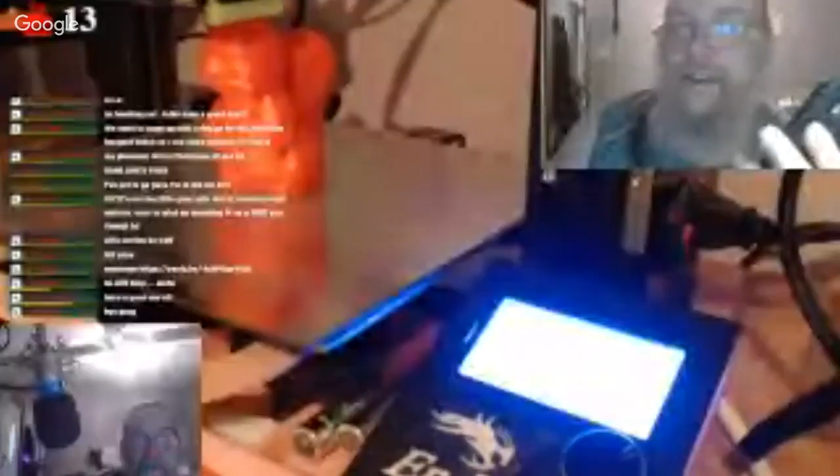Hey, we were trying to catch you guys before you left. We still had the hangout running. Oh did you? We weren't live, but no, it's fine. Get you some live time. But me and Dee were still sitting over there talking and watching his stream.

Alright, pop out the chat. Did he just jump in? Did I just see him jump in? Dee, he should be. Yeah, I should be in here. Yep, you're in here, pop out chat. Dee should be on his way.

So you guys never shut the stream down? No, we shut the stream down, just not the hangout. When I say goodbye to everybody, that's just saying goodbye to everybody online, on YouTube, on the video. Oh, everybody on YouTube. Yeah, because YouTube kicks you off. You can stay in the hangout, but YouTube kicks you off after 8 hours. Well if I'd have known that, I wouldn't have fired up a stream. Yeah, we just said right. No, that's fine, get some lunch done. You got all of us, so.

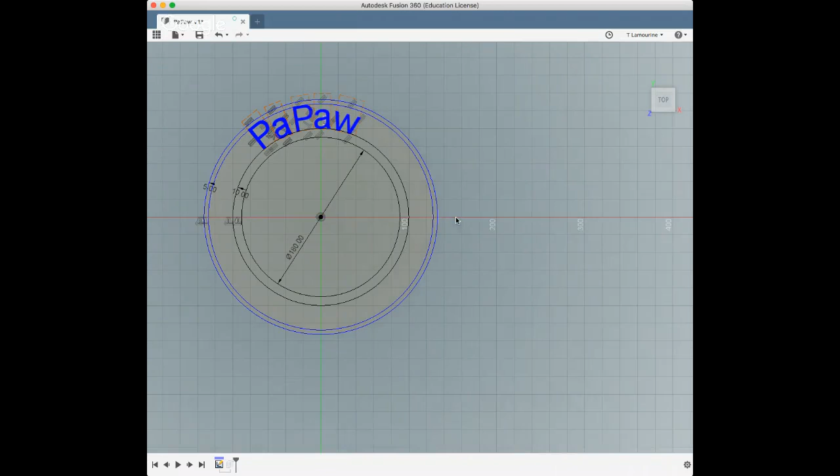There, I know he's got it now. Okay. So, my microphone is 180. So I've got this inner dimension correct. Well, the inner dimension that you've got is 180.

Yeah, it needs to be 178. Are you going to do a knockout? I don't know what you're calling it, in other words a knockout, want 180, but then there's going to be a shelf down to 176. Or is... yeah, there's going to be a 2-millimeter lip around both the front and the back edge. Okay, that's easy, but the 180 should be alright. No, that'll be too much. Wait a minute, right, so that needs to be 176. 176, 178, 178. Boom, done.

What else? And then there needs to be an 11-millimeter wide, 2-millimeter deep groove on that center ring. Yeah, I'm not worried about the groove, I had that at the end. Oh okay, is this wide enough? 10 millimeters. Yes.

And is it 5 on the wide outer ring? That's good, is this wide enough at 5? So you just want a line right from here to here? Yeah, but closer to the lettering. Hang on just a second.

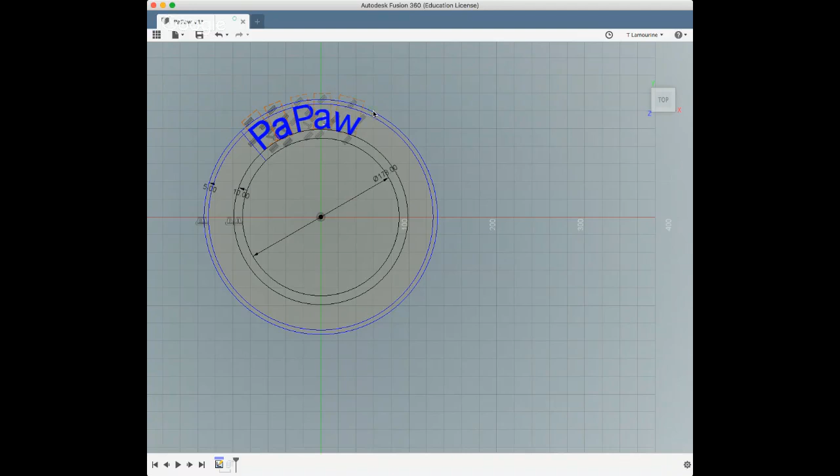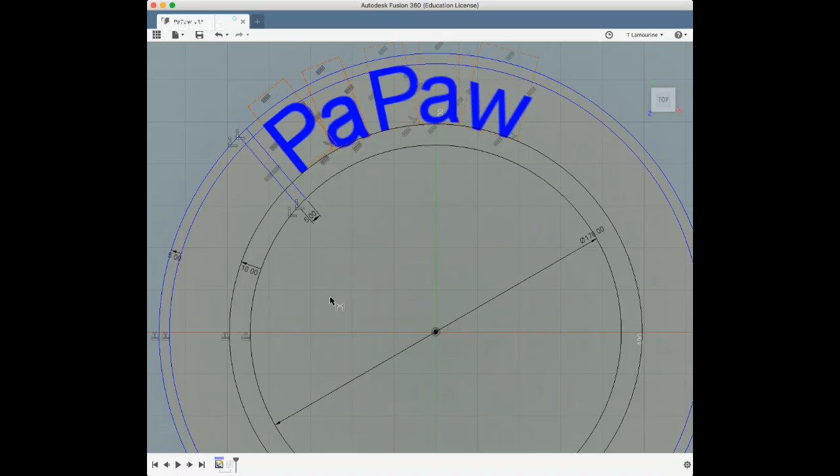All right, these two parallels. Parallel, boom, done. Oh, they already are. How far apart you want them? Hang on just a second. Everything else is 5, so I'm just going to do an easy 5. Yeah, I want the sides to be the same as the top. Okay, 5 it is.

Same thing over here, draw a line, and then get the spacing away from the letters symmetric or the same, whatever. I just placed the letters. If you look, I think one's bold and some aren't. The text is the hardest thing for Fusion to deal with, it has a hard time with text.

Okay, so if I extrude that now, it should be all right.

This is the other thing I don't like about it, because the move tool kind of gets in the way of the actual moving. That second A has to be touching the bottom ring. It actually is, okay, so it's not free floating. See, but now it's got a freaking lock on it somewhere.

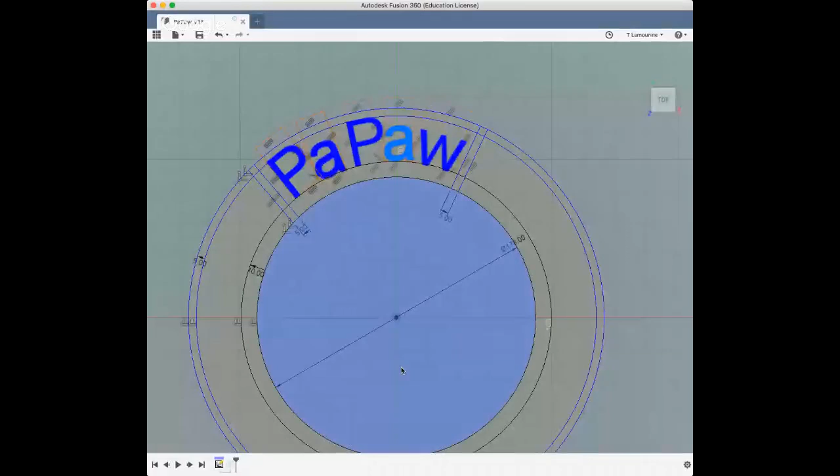Whoops, what'd I do, hit the wrong thing. Is it still showing you guys my window, or is it black? Where'd my window go, it's black. Where'd the window go? What the hell happened? There it is, back again. I'm trying to do too many different things at once.

Yeah, it's in contact, just barely, but it's in contact. I wonder if I can rotate it a little to get that. God damn it, I keep doing the wrong freaking key combinations because I hate it when everything does different key combinations.

Move is a simple M. I don't want to move that one, I want to move this one. Cancel, too many windows open. That one, M. Rotate a little bit. I don't even think it'll let me because it's already locked down. See, they're all locked together. Yeah, which I can break. See these little things right here? These little icons, those are the locking combination thingies. I don't know what they call them, constraints, I guess. Now I should be able to move that.

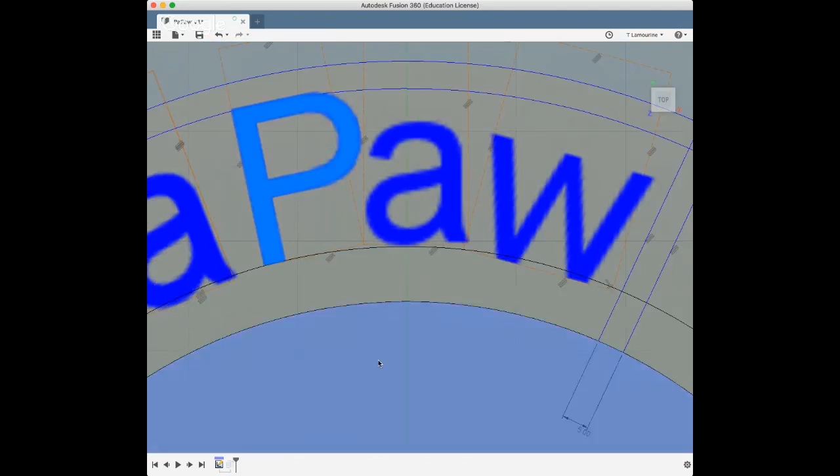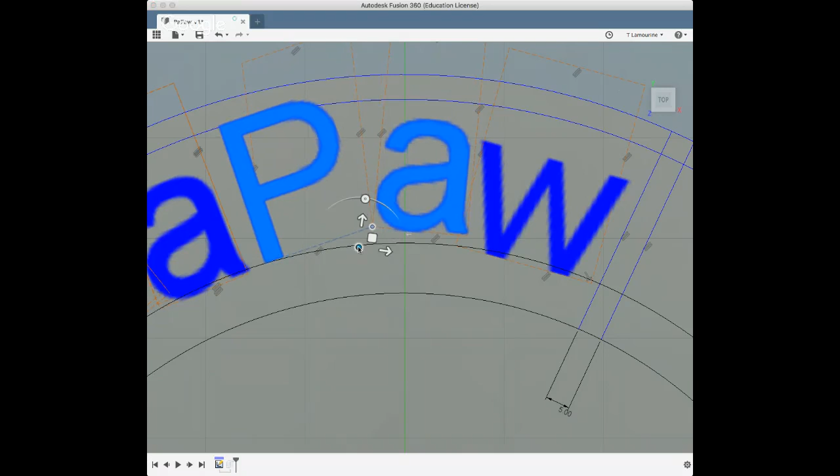So it keeps selecting the P for some reason, I want to select the A. Move. Now I should be able to rotate this, and it doesn't want to rotate. Why does it not want to rotate? Why are those still too locked? Those should not be locked anymore. I unlocked them. Command Z. Oh, easier way, cancel, delete.

Put a new one in. Yeah, text is the weak spot that I found with Fusion, and I think there's a way to do it, I just don't know how. Yeah, I'm going to lock it to the circle. Hey, yeah, I made it 40.

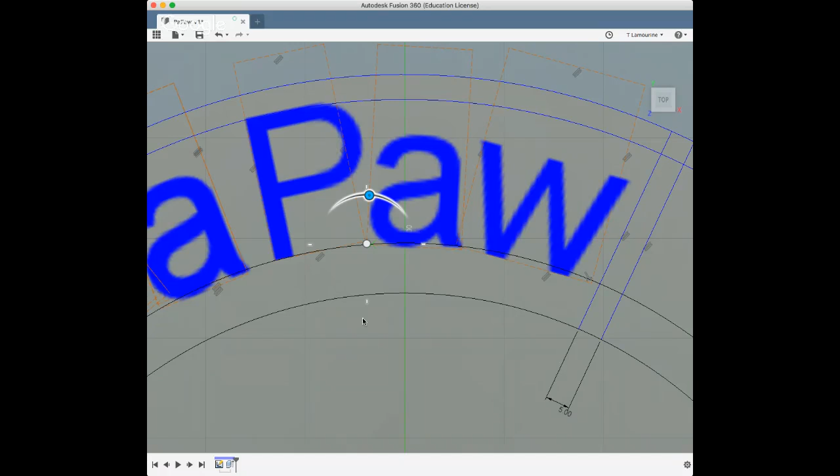That's not attached, is it? Edit sketch, it should be attached. Oh, I know why, I have to edit this because it's still remembering the other one. Now it's attached.

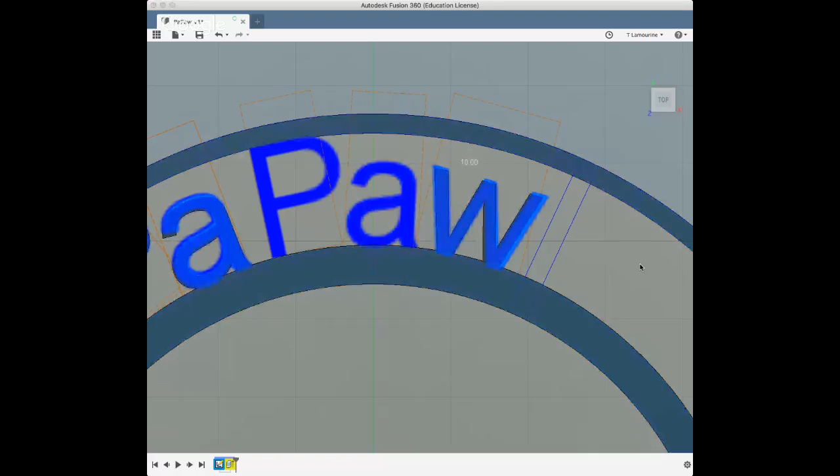Okay, then I want to extrude it. My poor little computer is dogging trying to do all this stuff at once.

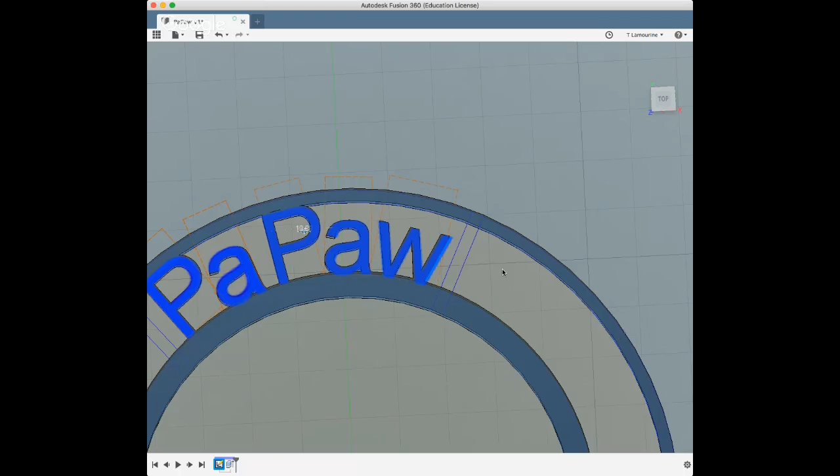Whole thing, all right, I gotta edit that out. Remembering the old stuff, I can almost do this faster from scratch.

I gotta bring my mic over here so you can actually hear me, huh? Yeah.

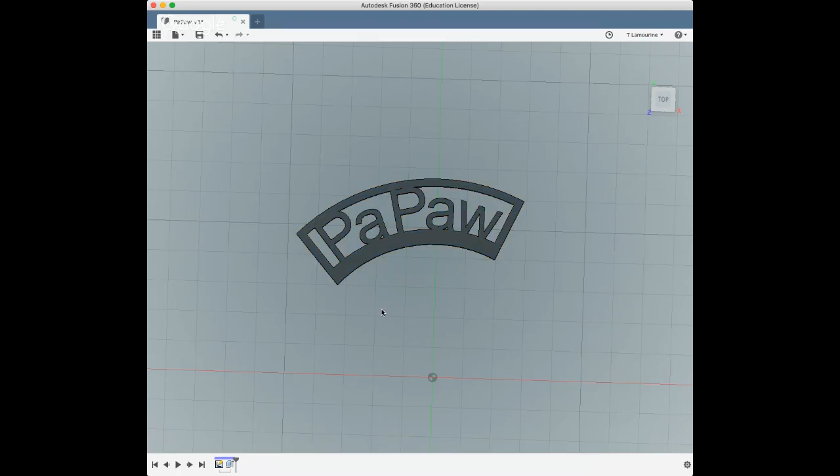Okay, that's basically what you're looking for, right? Can you see me? That what you're looking for? Yes. That's it, right? Now you want right here, you want a lip, correct? Yes, all right, let me see if I can get this right.

How much of an extrusion, how thick do you need this thing height-wise? I need it to be a groove through the center of it. Oh, hang on, before I get into that, how much of an extrusion here? How deep does this need to be? 15 millimeters. 15, yeah, because I had it at 10. 15.

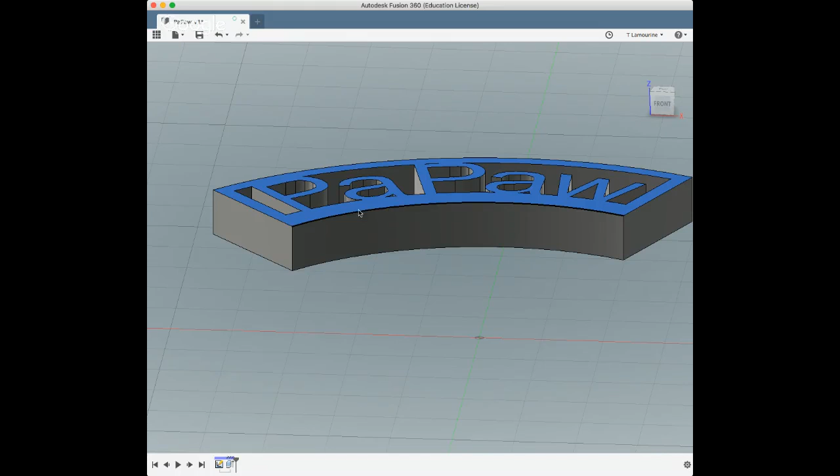Turn, okay. And it's going to take my little computer a while because I'm hosting this and doing that. Okay, now, you want a lip where? Right here? Down on the bottom, you want it on the bottom or the top or in the middle? Hang on a second, let me...

Okay, let me close. Nope, let me shrink. All right, can you see me? Sort of, but not enough.

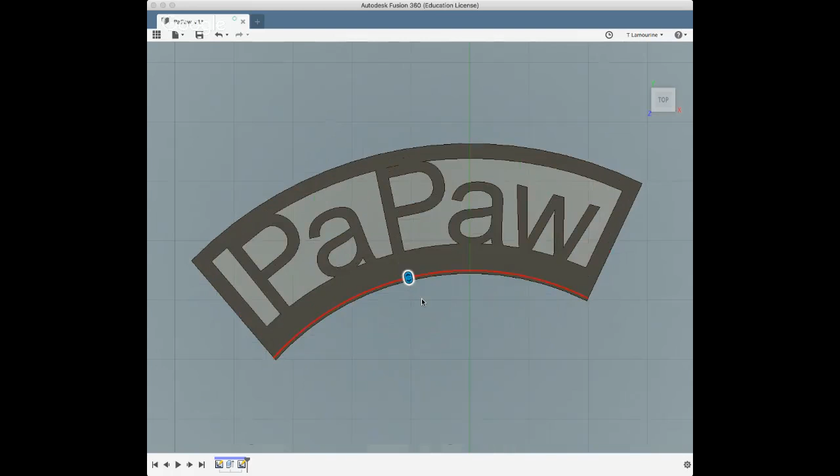Okay, how deep does this groove need to be? 2 millimeters. That's the depth into the cut. Correct. And it needs to be in the center, 11 millimeters wide. That's only going to give you 11 millimeters out of 15, leaves you 2 on either side, correct? Correct. Offset, negative 2, negative 2 with a negative 11. Boom, done.

That's what you're looking for. That's what I'm looking for. There it is, all done. Son of a bitch, and that took me longer just because, if I knew the dimensions beforehand, I could have done it even faster. Yeah.

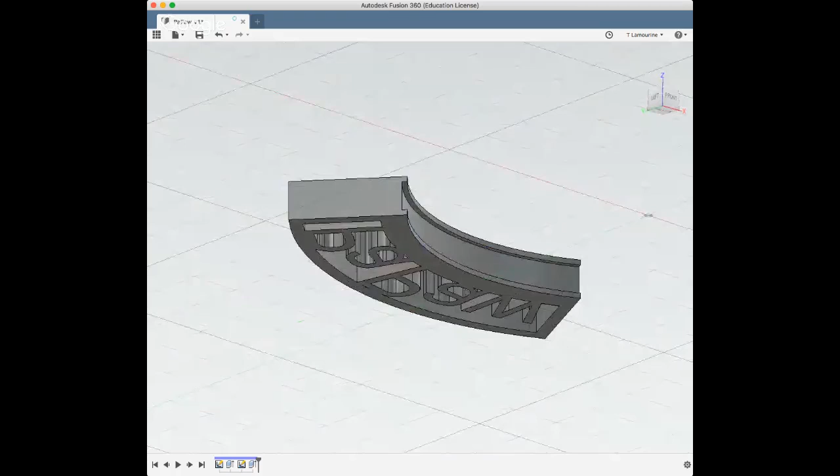I still think you need little kitty cat paws right here. No, come on, no, you need this. PaPaw is not about animal paws, it's about grandkids. Yeah, but it's still a pappy paw. Yeah, paw, pappy paw.

You want anything rounded off, squared off? No, just like it is, looks good. It looks kind of boring with no chamfers or anything on it, man. Different font. That's just the first font that came up.

You can't change the font now, can you? I can do anything I want. My standard font is stencil. I don't think I have that in this. It's pretty common. Arial. Stencil. Sticks. ST song, no stencil. Okay, then just leave it like it is.

Stencil's the one with the little knockouts, like a regular old-fashioned paper stencil like we used to use in high school, right? Yes, I think there is one of those. They just don't call it stencil, they call it something else. Now I got to remember what the hell it is. I think it's actually in here too, and actually it might be stencil, it's just something stencil, you know what I mean? So it's not the word. Right.

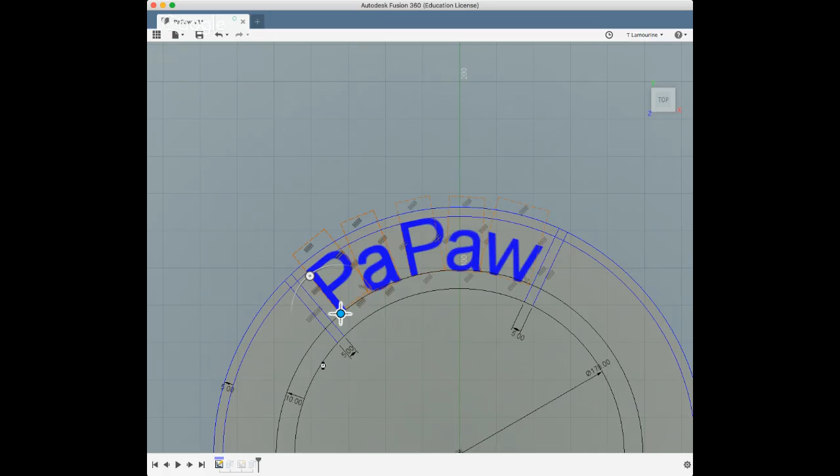Well, for now, we'll just leave it at this, he can always print another one. Yeah. But I've got, what version is this, CS3. Wow, that's old. Yeah, I had CS4, it was the last one I had, not as old as mine.

Mine is just Photoshop 6. Oh, God, that is old. Yeah.

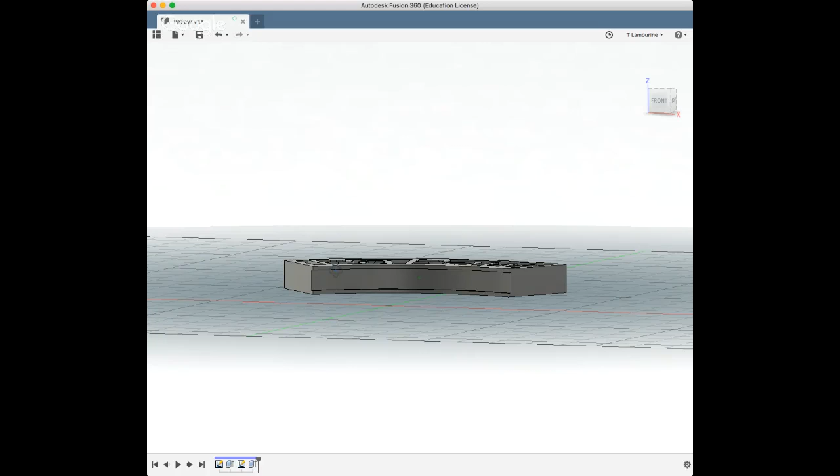If you guys are on Macs, see this right here? I know you probably can't see it because I'm just sharing, but there's a program called Affinity Designer and Affinity Photo. They used to be Mac only, but they're actually doing the PC side now, and they're very comparable to Photoshop, and they're like $29.95 each. They're freaking awesome.

GIMP and Inkscape, oh, I can't stand them. Both of them, the way they run off the Unix system, just bogs my computer down to no end.

Anyways, I am saving this. Save. Next, save STL. It's going to overwrite it. Yep, replace. So for this kind of thing, it's mostly squared off stuff, it works good.

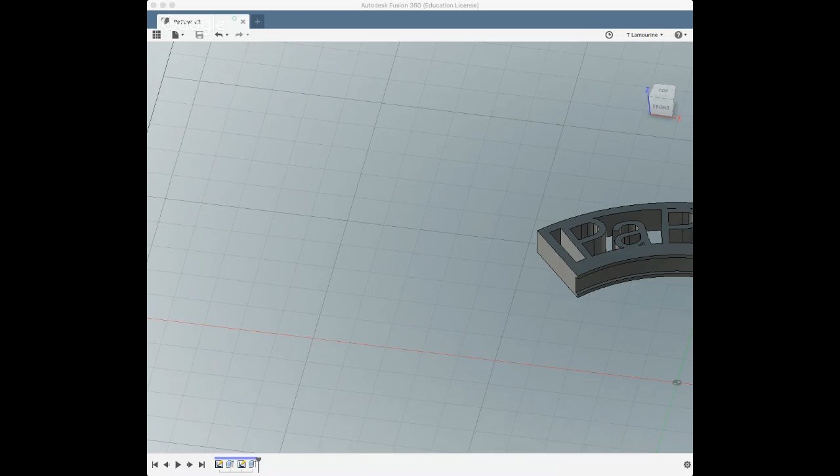Does it work just as good on artistic stuff like Ricky's Jeeps and stuff? Yeah. The Jeep I wouldn't call artistic. But your basic mechanicals, it's way better than just about anything, without getting into more complex stuff.

Honestly, it's kind of funny because my brother runs a big company. He's basically the vice president, or he's not actually vice president, but he basically runs the place now. They build the circuit boards and stuff for coin op machines. Like if you see a Coca-Cola machine, Coca-Cola owns the machine, but they do not own the little coin op block in that machine. It's usually contracted through a coin op company.

He's got 3 engineers there, and they all wanted SolidWorks, so they went out and paid for the licenses for SolidWorks. Well, they hired 2 new younger engineers who said, yeah, we want SolidWorks, but we want Fusion 360 also. Actually, they use Inventor. They're like, we want Inventor also. It's cheaper, it's faster, it'll do a lot of the stuff SolidWorks won't.

SolidWorks has its advantages, Inventor has its advantages, depending on what you want to do with it. They almost all, the 3 original engineers, are all using either Fusion 360 or Inventor now. They don't do anything else, they barely open up SolidWorks at all. They're like, SolidWorks has its advantages, don't get them wrong, but any shortcomings in Inventor or Fusion 360 they've come across, they can fix way easier and in no time compared to the few issues SolidWorks has.

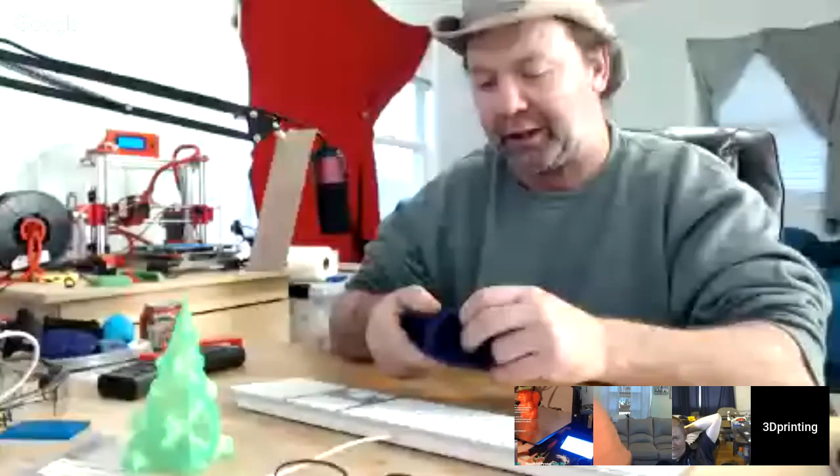They got those high UV output cure boxes now that'll cure them in about 10 minutes. Yeah, you can do it with a black light. Or put it outside in the sun, the sun's better, one of the best cures. Takes like 10 minutes in the sun to cure it, depending on the color. If you've got a solid color, it takes longer to go through it.

Get that all fixed up? Looks that way. It's on the printer.

When you go to Open Fusion and you're looking for tutorials to play with, don't even bother going to YouTube. Open up Fusion, go to the Help menu, and there's a whole bunch of tutorials right there inside the app that are absolutely perfect for Fusion. They're all like 3 to 5 minutes, very specific to a tool. They show you 2 or 3 different ways you could use that tool, then move on to the next one. Is that what you're doing, Mike?

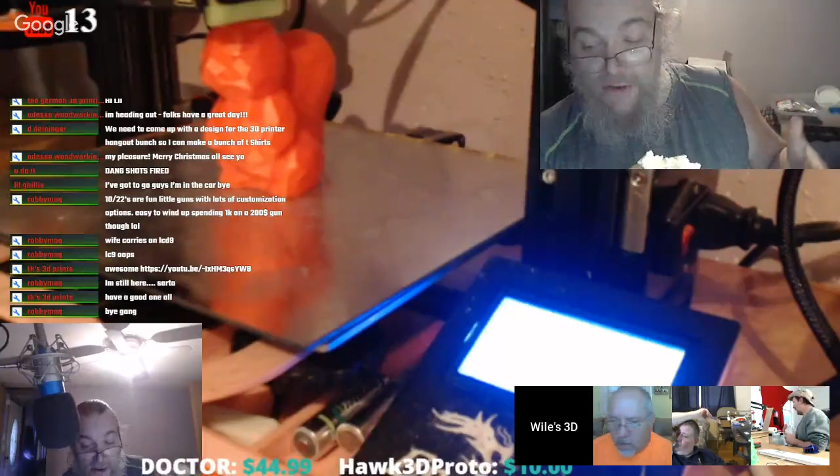I started Learn Fusion 360 in 30 Days. It's a course on YouTube, and you can do as many as you want a day. But yeah, I've looked at them videos too that he's talking about.

Yeah, I've done both ways. The ones I kind of like because they repeat the steps. The Learn Fusion 360 in 30 Days one, they go through one command, and the command goes by, and that's it. Well, no, they've been hitting them back up, because you use the same commands for different things in every design.

The ones in Fusion are just very specific to a tool, and they only do the tools most used - your extrudes, your circles, your sketching. It's very basic, just enough to get you started, but that's all I think he's going to need, because he's got it. I could tell the way he was working just in Blender - he understands the whole concept of the 3D relationship and how to do it. So the rest of it in Fusion - and Fusion's kind of self-explanatory. You start doing something and you screw up, it lets you know. It's got an error code that tells you right away this will not work.

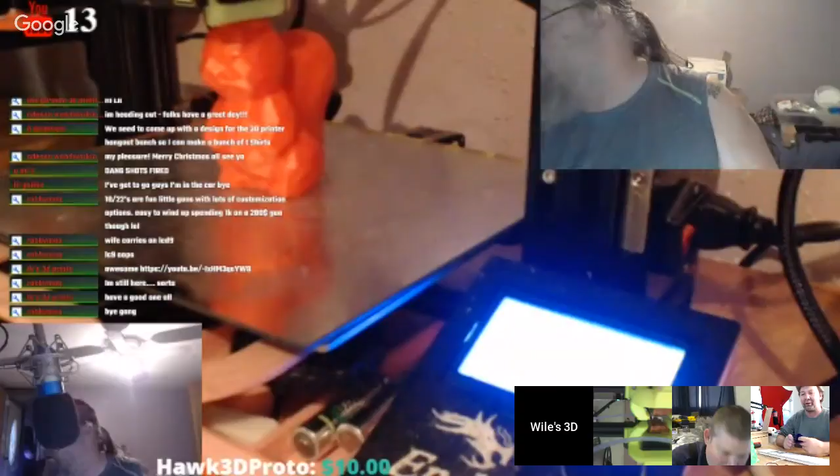You don't need it, the other ones do work, they work just fine. There's really nothing wrong with them, it's just that the Wacom is the creme de la creme. There's a noticeable difference when you start using a Wacom after using a cheapo. It's much more refined. I don't even want to say more precise, it's more natural, if that makes sense. You don't have to think about it, it's just like drawing with paper and pencil.

Like I said, this one has the right and left click on it also. Yeah, mine's got that too, that's the actual Wacom one. And mine's got a mouse too. With this one, with the press, it's not a mouse, it's just a pen. Oh no, mine's got an actual mouse.

Well, the new Wacoms are actually touchpads too. There's no more mouse, you can just hit it with your fingers and hold your finger there for a second, and it asks if you want to use it as a touchpad, and you say yep, and you can use it as a touchpad.

But I hate touchpads, they drive me nuts. The whole put three fingers down, twist your hand around, use both hands, do this, swipe here, do that. It's like no, I'll use my regular mouse, thank you very much.

Lift your leg up behind your head and stick your toe up your nose. Yeah, the whole touchpad thing, the Apple touchpad, now they got that touch bar. It's just stupid, I don't need that stuff. It does not make my life easier, it makes my life more complicated.

That's because you're old, Tom. I am, for the future, you know. You realize I've been working on computers since like they existed. Kind of funny, I got them shortly after they existed because once my uncle got a new computer, I always got his old ones, you know.

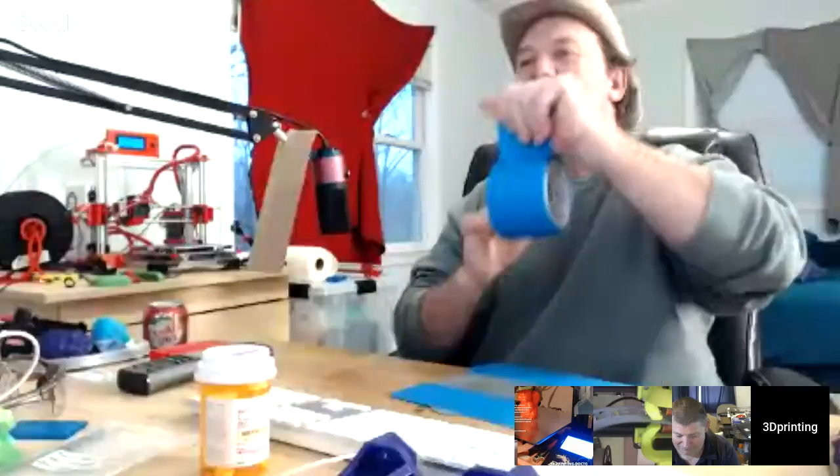Well, it's getting low - I've had this about a year, and it's time for a new roll. That's some nice big thick stuff. This isn't even my thickest, I got 4-inch instead of 3-inch. But the 4-inch is really cheap stuff - this 4-inch roll is $5 cheaper than this 3-inch roll, because it's some no-name. This is actual 3M, really nice stuff. Yeah, some cheap no-name brand.

There's one thing I like about this - nothing ever lifts off of this, because this stuff is true painter's tape, and it's got like a soap on the top face. So when you hit it with rubbing alcohol, it gets gooey and the print sticks to it. The problem is the print sticks to it - if you hit this with rubbing alcohol and then print on it, the print is not coming off this paper without soaking it in rubbing alcohol or rubbing it later. It's sticking to this - even ABS will stick to this. I've had this tear the tape off the bed before it'll separate from the print. Every time.

Okay, there's like right on the edge. You know what, I'm going to replace that piece too. I just don't care.

I took that ultra base off my printer. I couldn't get anything to stick to it, so I just put the PEI sheet down and it's been working fantastic. Yeah, even PEI, I actually like blue tape better if I'm concerned it's going to not stick. I still get PEI to let go on occasion in the middle of a print.

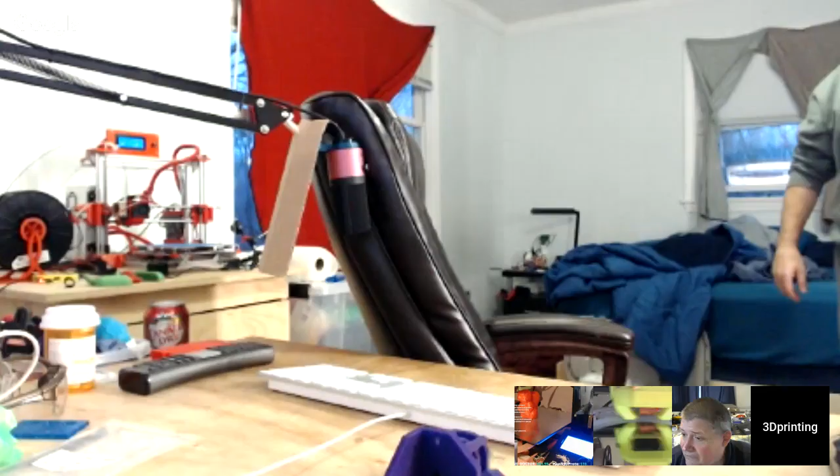Can you hear that? Yeah, turn it down. Fartin'? Oh, Martin, Martin, I thought you said farting. Martin, it's farting.

I need a drink. You hang out. Yeah, I'm just popping around different channels. Uh-oh, is Tom starting, or Tommy almost starting, a cocktail hour? Let the fun begin.

I still gotta dig through boxes and find my Roku, whatever the hell it's called. I'm gonna go watch my YouTube videos and everything, you know. I hooked up one of the Amazon Fire Stick TVs, just like the Roku, but it also has all the content from Amazon Prime. Yeah, we were debating what to go with.

Oh, I got such a good deal on them I couldn't pass it up. I got one of the 4K versions when they first came out, and it was like $30.

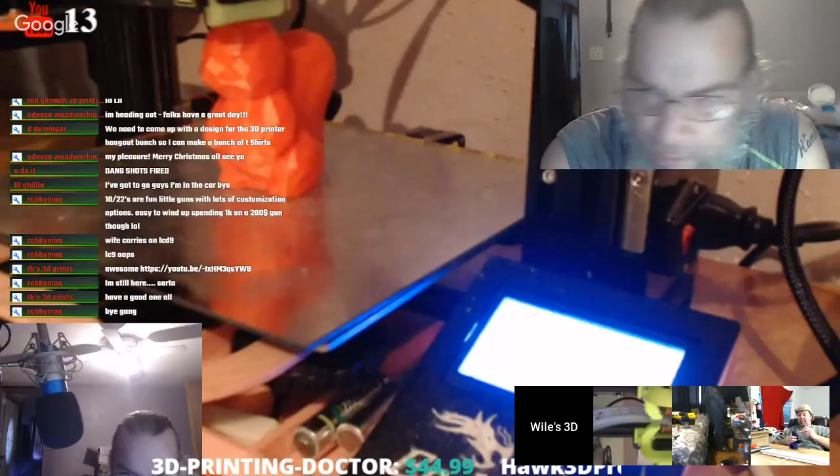Beer never thrilled me. I drink beer because my friends drink beer, and I like a good beer, just not the funky ones like Mickey's. Otherwise give me a Busch Light or Bud Light. I can drink those, and I actually like them in the middle of summer after a hot day of work. I can come home and chug a cold Busch or Bud. But if I'm going out to a bar, I'd rather have a Sam Adams. I do like Bass, though Bass is actually my favorite.

Have you ever tried the Sam Adams Utopias? It's a super high alcohol content beer. I used to get the triple bock. Yeah, that's like drinking brandy for crying out loud. One sip of it is like chewing a whole loaf of bread, it's thick too. I think it's the same thing as their triple bock. It's chewy, not even drinkable, kind of nasty. If I gotta chew my beer, I don't want it. It's actually a good drink, but it's so thick and heavy, like finishing off a whole loaf of bread. Yeah, the triple bock was the same way.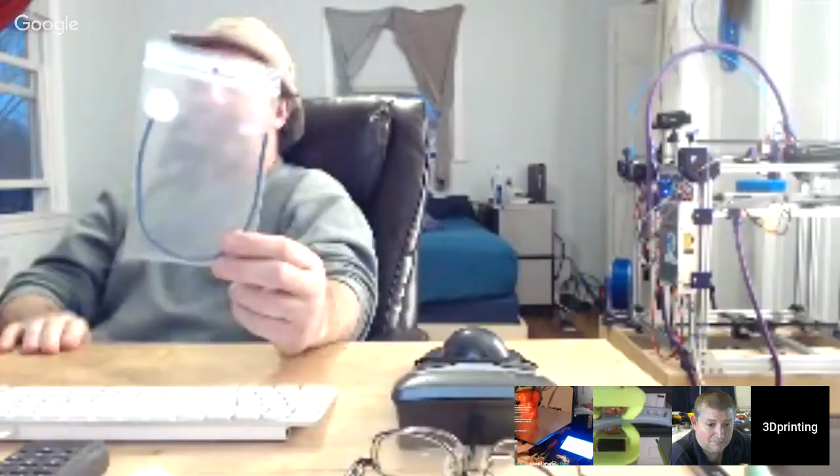I've done mine, I've done both of these. Still got what I got left, and it used to just arc over and meet the other end. That's how much I got, $7. So this will last me years, so it's worth it in that sense.

But yeah, I had this, this is the dark stuff. I had this on that originally and it would just jam constantly. And it wouldn't even jam at the extruder, it would jam in here, inside the tube. It would just jam in there. Like when I'd go to load it, it wouldn't load it, it would just sit there and skip.

Now I've been thinking about putting it back on there. And I got the Bondtech extruder, because I don't care what you say, that thing will, I'm scared that thing's gonna blow my freaking nozzle right off the edge of the extruder. That thing starts pushing and I hit it.

That's 1100 millimeters, that Bowden tube, extruder to the hot end. So when I load it with that control panel, I loaded it like 3,700 millimeters a second or something. So it loads it like that, pushes that full length in no time. You hear that thing whine.

Well, when I first started doing it, I had it like 1,200 millimeters, figuring I'd hit it and extrude an extra 50 or 100 millimeters. And it just started, the whole freaking printer started shaking. I was like, whoops, don't do that no more. I literally was concerned it was going to blow apart the heat break or something, just tear it apart.

I gotta go guys, I got 3 dogs that are... That are what? I don't know, he clicked himself out before he finished the sentence.

You know what's coming up here now? I'm still looking for my damn Roku, whatever the hell it's called.

Grinder. Not getting this one too well. Mom's crap, she'll want that. Some sticky stuff in. Alrighty then.

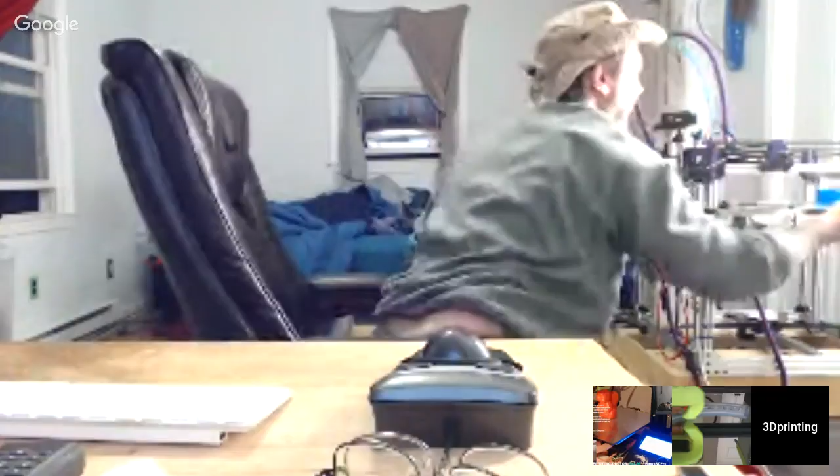That's done. What's that? A lot darker and thicker than I thought it was going to be. I'm gonna have to cut some holes in it, that way the light can shine up through here.

No idea what these are. Some sort of applicator for a woman, I think.

I just noticed this tree is 5-sided, not 6. This tree is 5-sided, not 6 - most things, hexagon. Christmas tree, it's 5-sided, well 10-sided, you get right down to it, but it's not a hexagon. It's a five-agon or whatever you want to call it, there's a name for it. What the hell's the name I'm looking for?

Let's see, what can I draw him here with? God damn it.

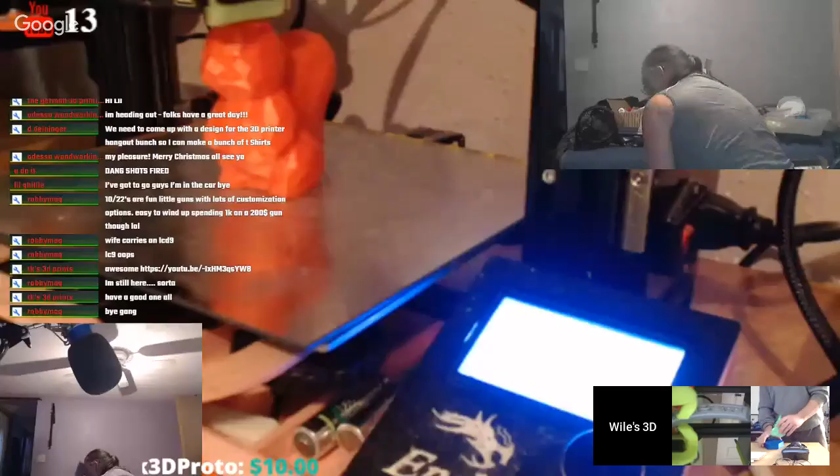What the hell's in here? It's just so heavy, same thing.

I know I've seen a shirt around here somewhere, I just don't know where. Just turn it here too.

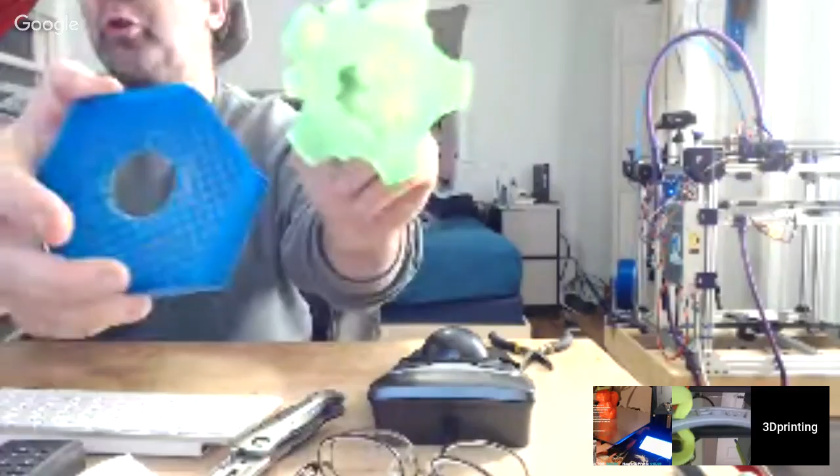After all that, now there's holes in it so the light can get up into the Christmas chimney. Look, holes - they're very rough cut holes, but they'll let the light up there, and the tree will glow. I'm going to glue that puppy down now.

There you go. God dang it, it's right underneath my desk. Right in front of your feet? Right underneath my desk the whole freaking time. In other words, if it was any closer, it would have bit you. I'm surprised it didn't bite me.

No, it can just bite me. I'm mad. All right, that don't look so bad, does it?

Glue that puppy. Where's my glue? What do I do with my glue? On the bucket, dear Liza. A glop. Oh God. Glop. Oh crap, I'm getting glue everywhere.

So you've been tinkering with this Fusion 360. Have you designed anything yet? Just whenever they told me to. I did do one thing, I forgot what it was, but I did do one thing. I couldn't get it out of there. I designed it and everything, but I can't get it out. It is what it is. It's still in there. I think it's gonna stay there for a little while. I can't get it out. Sounds like a personal problem.

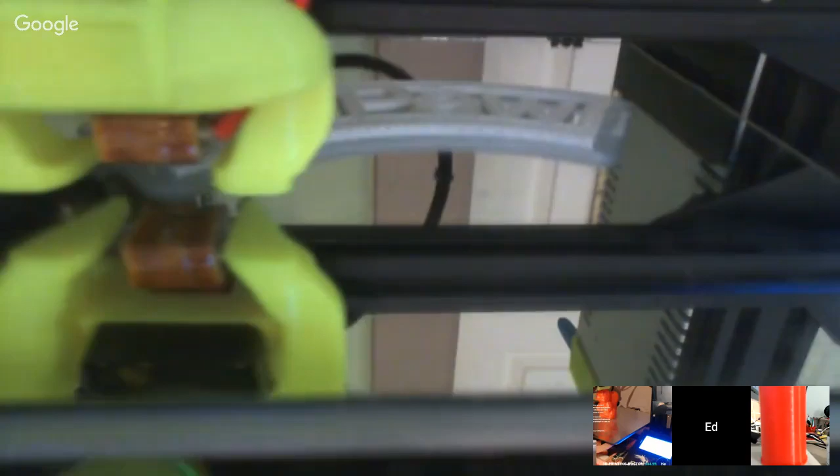I'm gonna have to cut out of here and go make dinner. Dinner? Well, you can leave, me and Ed are staying. You can shut it down, but me and Ed are staying, right Ed? That's right, now that he knows we can stay. No, if I boot you, you're not. I guess not, yeah.

You do the big old ban hammer. You are correct.

Did you get that thing done yet? No, it said it was going to take like 4.5 hours to print. Really, it looks like it's half done. Well that was at what, 3 o'clock? And it's 5 now, it looks all right. Yeah, it's looking good.

I sure appreciate that. No problem, it's not like it saved me a lot of work. Yeah, you can still be in Blender trying to design it, right Ed?

Said you can still be in Blender trying to design it. Well, to be honest, this is my second attempt at it. I spent a few hours, 10 minutes. I was laughing when I said I could do that in 5 minutes in Fusion. He goes, yeah right, let's race. It was like 5 minutes later, I was like done. He's like, no you're not, you're kidding. It's like, no, I'm done, it's done. I would have told you that one. Don't bet on that one. He's done, I guarantee.

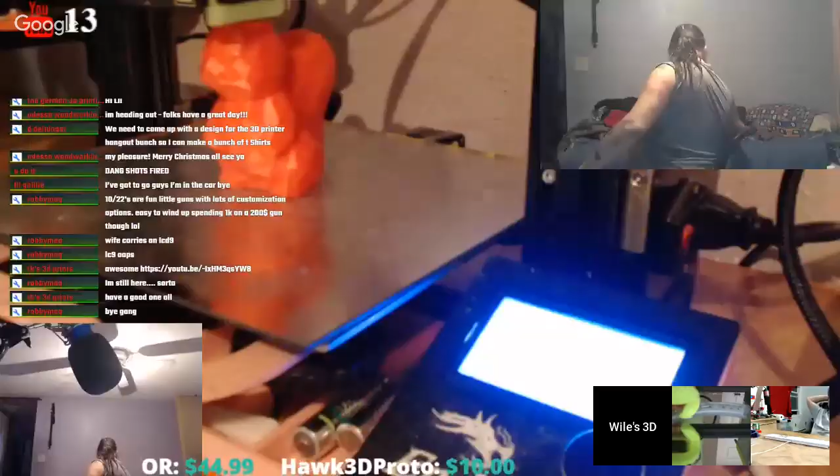No, you want to just share your screen so you can see it. Let's see if I can figure out how to do that. You go up into your chat window and there's a little side thing that says share screen. You got to go into the Hangouts window. Says I am screen sharing. Here you go, can you see it? Yep, I'm going to lock you on.

Present to everyone. Okay, right there, where's that little thing on the left? Right there, the sketch. Right there, click on that. Create sketch, okay. Now you want to go over to your little block over on the right-hand side.

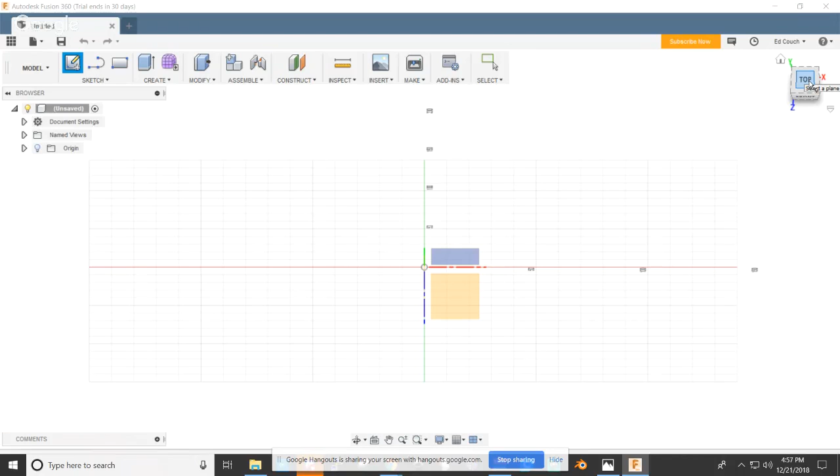Drag that around, and that'll move your 3D view around. Oh okay, good, because I was using the Shift key. Now if you go back over to that, see how it's highlighted at the top? Slide down a little bit, see how you got the corner? You can go actually over into the corner between the X and the Z, go over in the other corner, and you can click on corners and it'll directly bring you there.

Okay. But you can actually click in a corner too, you're clicking on an edge corner, you can click right there. See how that corner highlighted? That'll bring you to a corner. So now you're basically upside down. You can always hit your home and it'll return you to a home view. See the little house? Boom, done.

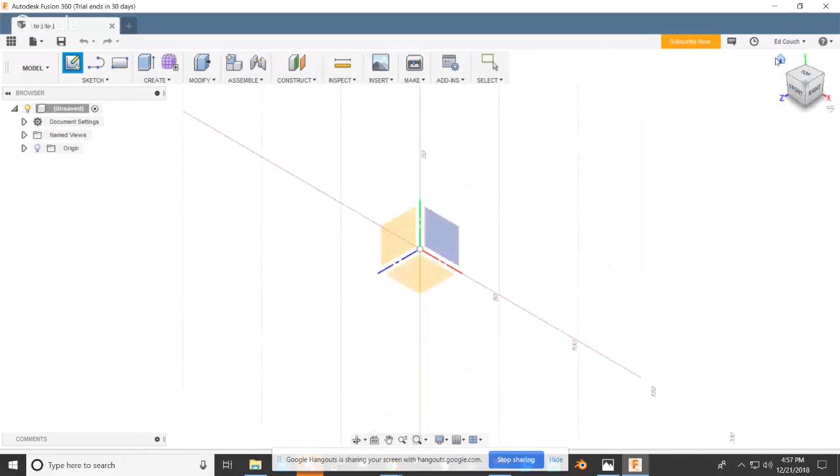Okay, now you got your 3 fields there. You have your X, your Y, and your Z. Z, X, Y, okay, yep. You almost always want to do everything on your Z, which is the one on the bottom flat.

No, go down to your little orange main window. See how you have the 3 orange windows and the 1 highlight? Yeah, that's your Z right there. If you click on that, it'll bring you into a flat above view. Now you are drafting, basically just drafting on a flat plane.

Okay, so you go up to your sketch. You're going to use that sketch menu. If you click on the word sketch up there, you'll get a whole pull down of stuff you can do. You can draw circles, lines, rectangles, pentagons, ellipses, slots, fillets, breaks, offsets, and mirrors. I mean, just select a circle.

Go up to circle. There's 5 different types of circle. There's a pull from center circle, a 2-point circle, a 3-point circle, a tangent circle, and a 3-point tangent circle. The best thing for this is just to start with a center point diameter circle.

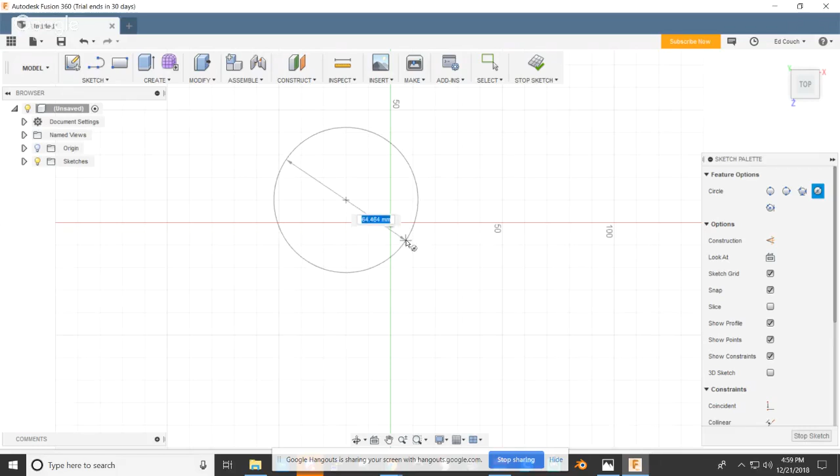Click on your center icon. No, because there's one thing you're going to want to learn. Stop, escape, Z, start over. See that little centering mark right there in the middle of the whole field? Yeah, that's the center of the world.

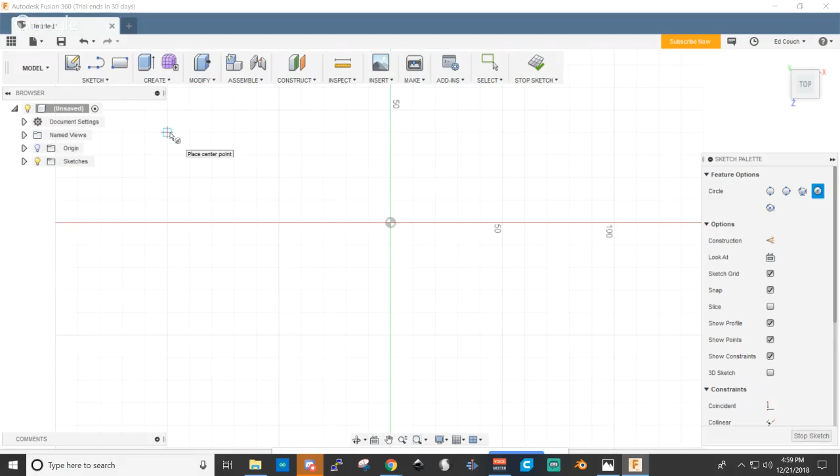Right, you should always just start on the center of the world. So go up and select a circle again from the center. Go down and hover over that, and you'll see the icon slightly change. See how it got a green square around it? Yeah, you pull, you're going to be dead center on the world. And then you just drag out.

Now you can type in whatever number you want. You wanted, what, 180 or whatever it was? I lost it now, you release. That's all right, no, watch this. Hit the D key, just the D key.

You've got a menu selected still. Just hit cancel, or escape. All right, now hit D. See your icon's got a little measuring tool next to it? If you click on that circle and drag away—click on that circle and now drag away—okay, now you can type in whatever diameter you want.

See how it's black outline, not blue? Yeah, that means you're locked. Black is locked. You can't change that without actually changing the dimension. You can't grab the center point and move it around. It's locked to the center point of the world at 180 millimeters.

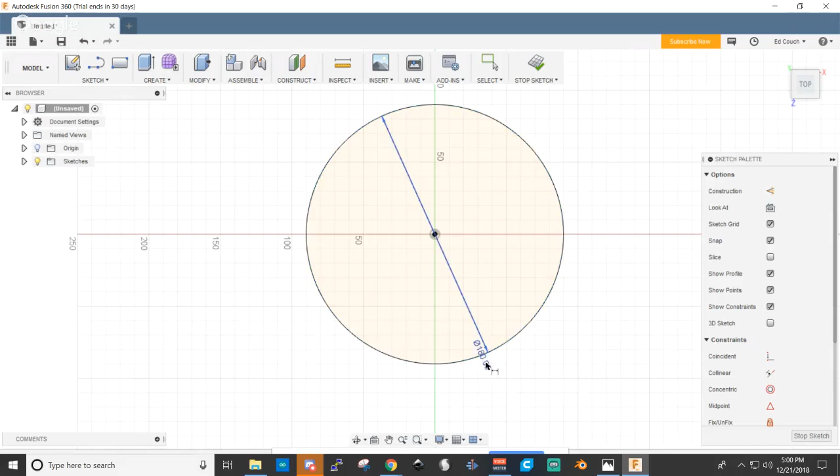Now, if you ever wanted to change that, all you have to do is double click on that 180 and pop in whatever number you want. It'll automatically change and pull for it. Now, because you have it locked to the center point, it'll always shrink down to that center point. If you don't lock it to that center point, it may go any old way it wants.

Right, now just to make it simple—well, yeah, all right, let's do an offset. Go down to offset right there. Offset circle? No, offset, go all the way down to offset. See it right there? Yeah. I use that a ton. Click on that, go back over to your circle, and just click on the outer edge.

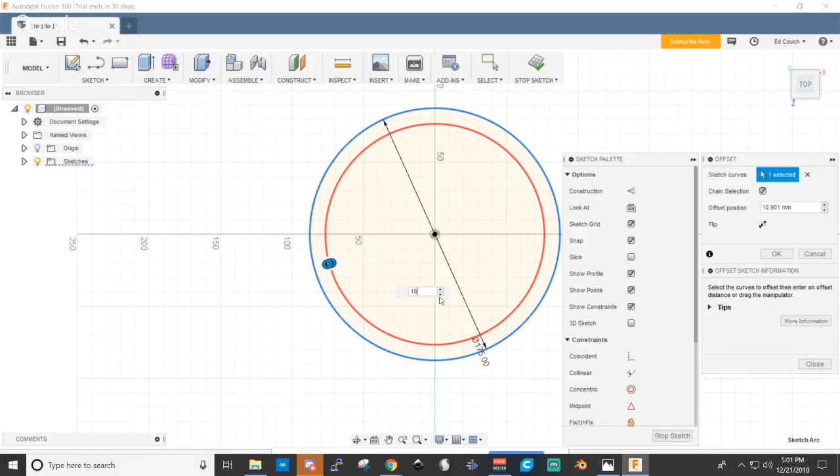Now you can drag that out or type in a number, either one. So let's say you wanted it 10 millimeters away. Does it not do negatives? No, you actually just pull it to the inside of the circle, and then it's a positive number if you want to shrink it. See, and then you just type in a number, whatever number you want—it's always a positive number. It used to be weird, it used to be a negative number.

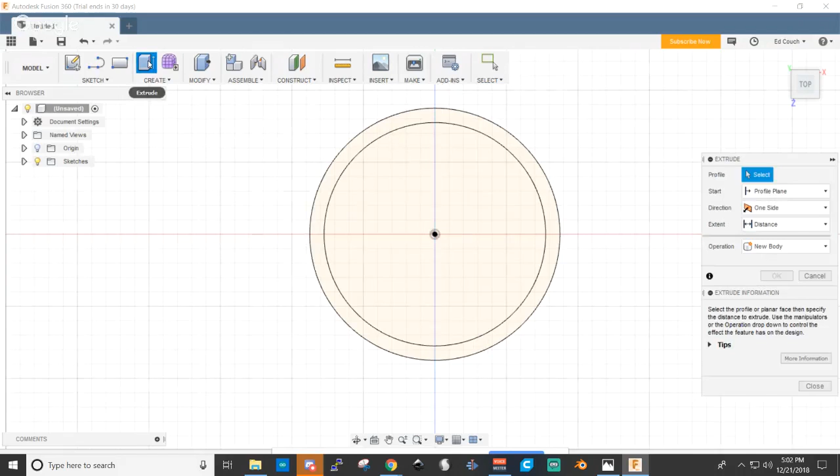Okay, now let's just say you want to extrude it now. Click on where it says create on the main menu—but you don't even have to go into that, see how it's got the icon already up there on the top? You can just click on that. Now go over to your circle, and see anything blue when you click on it? If you click on whatever turns blue, if you want an actual solid circle, that's one thing. If you want a circle, click on the circle.

I don't understand. You clicked on the center. Oh, click on the outside. See how it turns blue when you're hovering? I want to take this circle and end up with this ring.

You're right. See, right now if you go over to your 3D block and swirl it around, you've already extruded something. Well, now you didn't. Yeah, go over to the ring. You're okay now. You don't want the line, you want the actual ring to extrude.

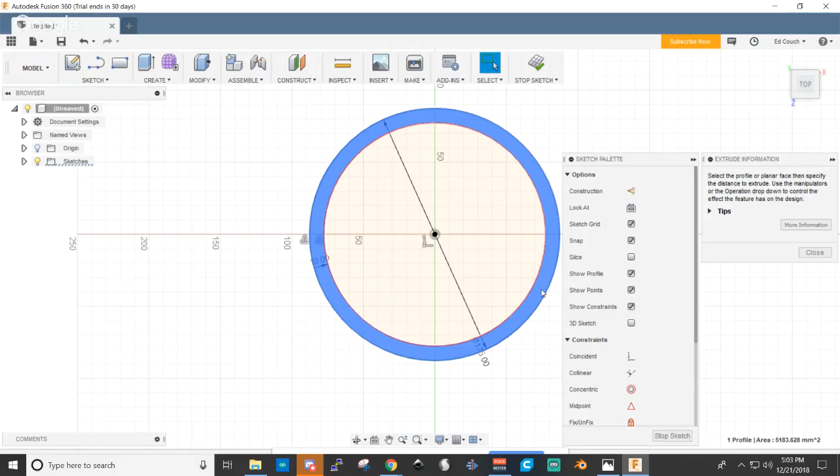See how that just turned blue? You want there, you go. Now click on that and just type in a number. Now you have a 25 millimeter extrusion.

If you go over to your homing block, I just hit home now so you can see it. Boom, done. That's simple. So where did that other thing go that was in the middle, the other circle? Out there, you didn't extrude it. It's just a sketch.

Now if you go over to where it says document settings, names, views, origins, bodies, and sketches - if you click on that sketch arrow, it'll drop down all your sketches, which you only have one of right now. See how it's blue? It's hidden in the sketch. If you want to see that sketch again, you just hit the little light bulb, make the light bulb yellow, and that sketch will pop back up, and it'll stay in view.

So where did this ring go? After you extrude that sketch, you've got to have that light bulb on. Right now it's off.

So where's this extruded piece? It's not in sketches, right? No, it's a body now. If you click on bodies, you've created a body from the sketch. See, the terminology is different. Yeah, but when you think about it, it all makes sense.

No, it's that the sketch is just a flat plane. A sketch is 2-dimensional. A body is 3-dimensional. Yeah, I'm with you.

Okay, and you said something about facets. Is that- yep, you click on where it says Modify, up on the main menu. You click on that and scroll down. There's fillet, there's chamfers, there's grafts. A regular fillet is your rounding edge.

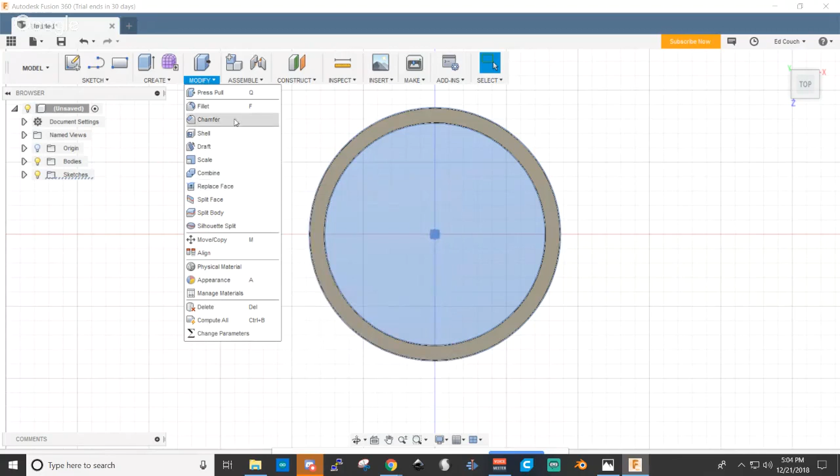All the way up to the top, you click on that. Now click on any edge, like right there, yep. And now you can type in a number or just drag it, and it will make a facet.

Again, whenever I do that stuff I always use that little home button, so I'm looking at home - I'm not looking from above, I'm looking at a 3-dimensional object, so you can see what it actually did. Now I have a shortcut programmed into my mouse where I don't have to keep going over to that block. I can just click and drag around, and I automatically pivot into the world, which helps a lot.

Now, if you go down to the bottom of the screen, there's that little mini menu. Those are all control of the view of the world. That right there, that's your pivot the world.

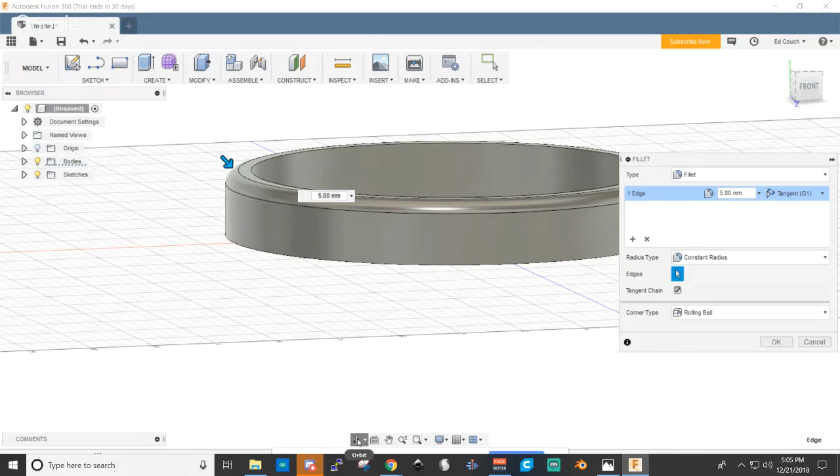Now when you do that, that stays that way. You can't stop that until you clear it again, or hit escape. I just hit escape.

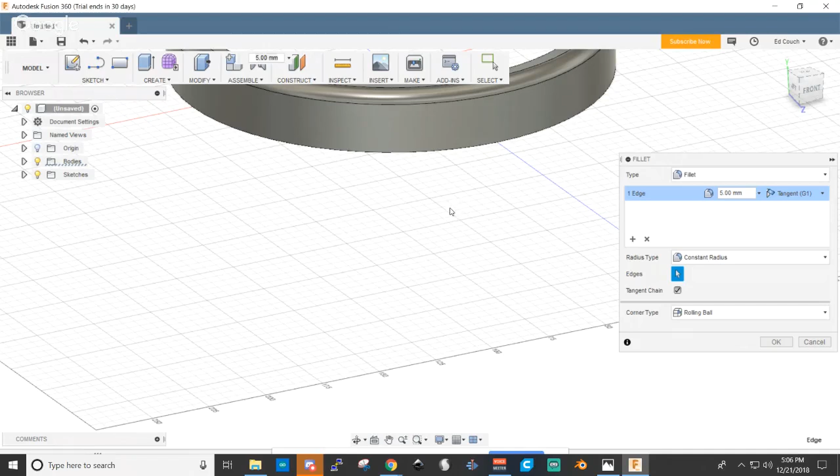Yeah, see now you want to get the window down there, right? The hand moves you around like you were just doing, which you must have a shortcut pre-programmed into your computer somewhere for that - you just did it without even doing it. Well, when I first loaded it, it said using the center mouse button you could do that.

See, I don't have a center mouse button, and shift and center mouse button does this. I'd reverse that because I use the orbit more than I use the hand. That's exactly backwards to what Blender does, so I'm not used to it.

Yeah, but you can change that. You just go into preferences and change it. Where's preferences? I'm not sure - are you on a Mac or a PC? PC. Yeah, it's probably up in the menu preferences, like right above the model, there's that little folded corner menu. Right there? Yeah. File? I think the preferences are in that, yeah.

On the Mac, it's just on the Mac menu. What are you looking for? It might be in your preferences. What do preferences do? They allow you to set up things like left or right mouse button functions, color scheme, and whether you want metric or universal units. That's all done in the preferences, like if you want metric, it's the first dots up here on the top.

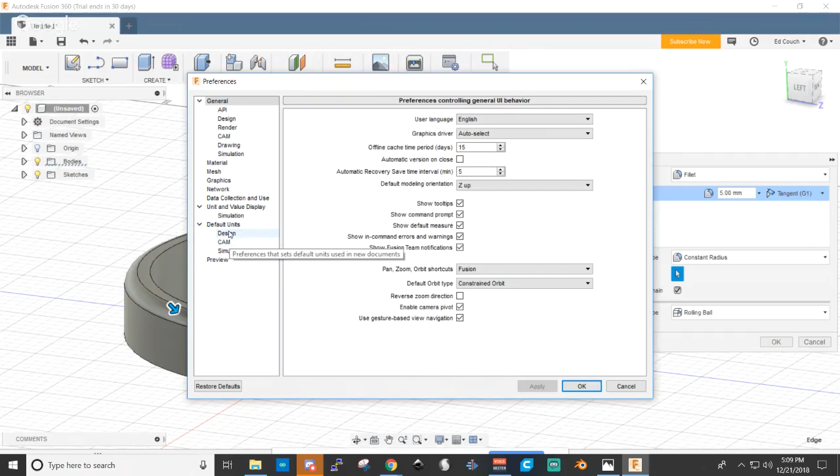It will still work - everything's exactly the same as you model. The problem is when you go to export it, the model will be sideways when you bring it into your slicer, it won't be oriented properly. Other than that, it doesn't change anything in the actual modeling.

You don't deal with vertices, edges, and faces in here - there are none. You're working in CAD, not in a faceted segment. Now, that little purple square up there in the middle of the create triangle, if you open that and start working in it, you do deal with vertices and points - that's direct manipulation of the 3D panel.

That's sculpting, just like the other one. You can't sculpt an existing model - you have to do all kinds of conversion to bring that into sculpt. You can't edit those directly. You have to convert it to a mesh and do all kinds of things.

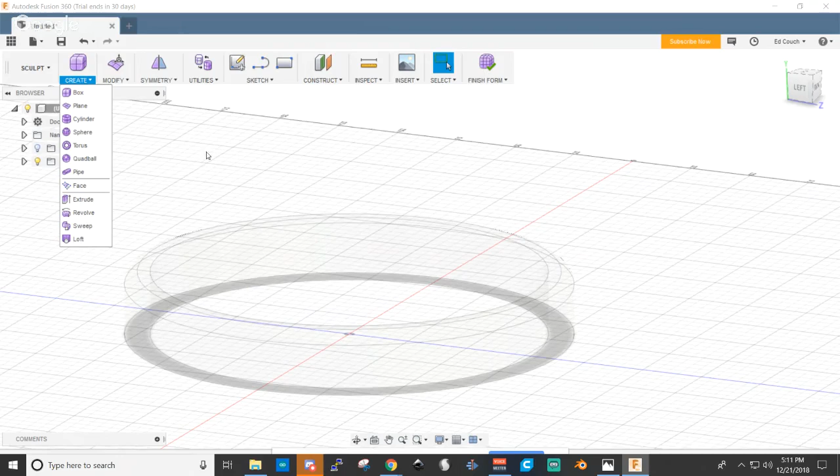So you want to go back to modeling - that means he has no idea, that's what blah blah blah means. I've actually played with it, but not very often. Just go back to modeling using the back arrow next to the disc icon, hit sculpt, and scroll down to modeling. That'll bring it back into the other form.

Those are all the things it can do - it can actually do everything. They're different modeling programs: one is modeling in CAD, one is modeling in Vertex, one is sheet metal, one is rendering, one is animation, one is simulation, one is CAM for CNC machines, and one is drawing so you can make actual drafting architectural drawings if you want.

Fusion does all of those, but they're all different, and they really don't interact very well with each other. They can, but you have to keep converting the file back and forth, and it gets kind of scrambled doing it. That's one of the reasons I like Blender - it has all those too, and they're all seamless with each other.

Yeah, but it only has the one - it's just sculpting. Blender is the equivalent of sculpting for Fusion. You are now CAD drawing - you can't CAD draw in Blender. It doesn't do it, in other words you can't draw a sketch and then extrude it.

Yes, I can - well, you can, but it's not the same, for sure. You're extruding it like you are in facets, not extruding it as a solid. That's a solid object you just extruded - if you were to do it in Blender, it'd be hollow. It actually has faces - if you extrude a block in Blender, a cube you think has 6 faces, in Blender it has 12. It has an internal and an external.

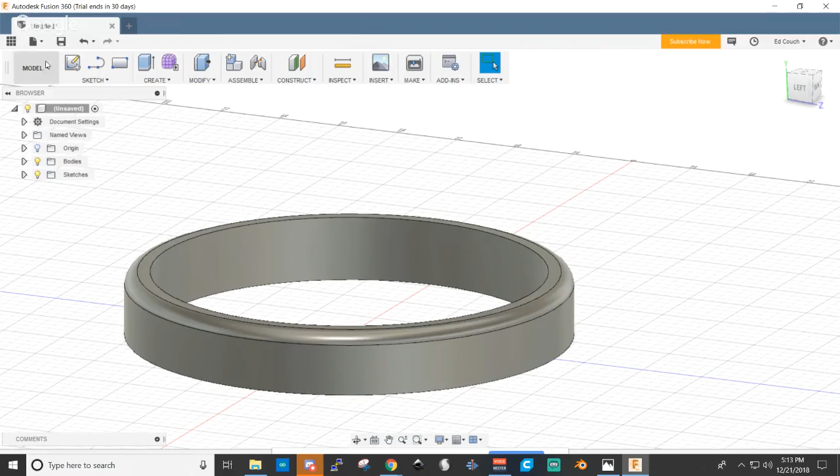So when you designed this, you just went here and somehow exported the STL? Yeah, if you go over to bodies and open that body's control, right click on that body, right down there in the middle it says save as STL. Boom, done. Yeah, but how do you get it out of there then? It saves it to your desktop or wherever you save it to. Well, that's pretty cool.

And you don't have to worry about all these flipped faces and non-manifold and all that stuff. That's my point. Anything coming out of Fusion is going to be a clean file. None of your slicers are going to have to fix them because it's a solid manifold object. It has no internal faces, only external faces, which is good for slicers and 3D printers.

Okay, well let me ask you this. I've got one I've been working on for like 3 weeks. Merry Christmas to you too, Rover. It's got some issues with it. Is there a way that I can import it from Blender as an STL file and have this thing fix it?

No, but yes, not easily. You can export it as an STL or an object file and import them, but it basically goes into the sculpting mode, and then you have to take the mesh and bring it over to a BRep, and then you can make it a solid. The problem is it's going to make that solid with the internal faces, because the internal faces are part of the model. You know what I'm saying? Yeah.

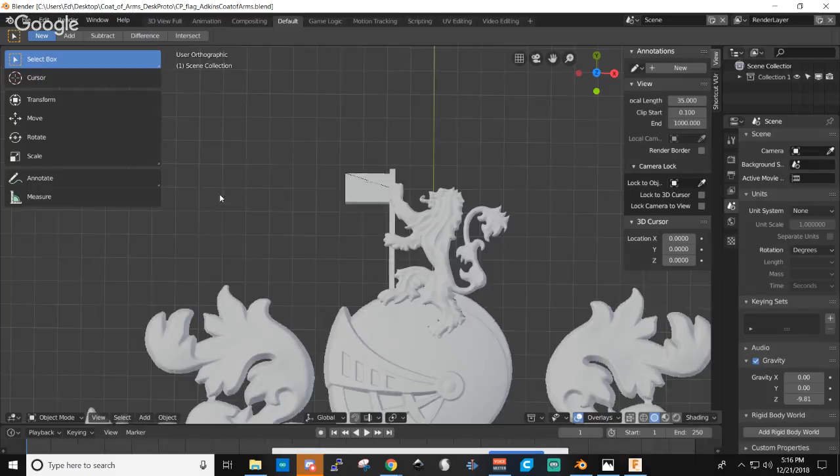Holy crap. Nice. Now I have not— Did you do all that? Yeah. Well, no, I didn't draw it. Yeah, you're just tracing it basically, right? Well, no, I went in and got the shield from Thingiverse, and then I went on GitHub and probably got the Fighting Lions and different things like that, and then I merged them together.

When I did that, I got all kinds of crazy non-manifold things where these feet and everything are joining. But it actually looks a lot better in 2.8 than it did in 2.79. Well, 2.8 will fix it too. Because you know what else you do? Are you considering that done? Well, once I get it manifold enough to print.

All right, here's the other catch: download Idea Maker, import it into Idea Maker, and let Idea Maker fix it. Idea Maker? Is that free? Yep, the free slicer from Raise 3D. And it will tell you that it has problems, and it won't let you do nothing until you fix it.

Won't even let you slice it until you fix it, and it will fix it. Something that complicated, it might take a while, might crunch on it for half an hour, but it'll be a perfect file, it'll look beautiful. Okay, good deal. And Idea Maker's free, and honestly it's all I'm using for a slicer anymore. Like I said, I don't know why— Idea Maker now. These were all done in Idea Maker.

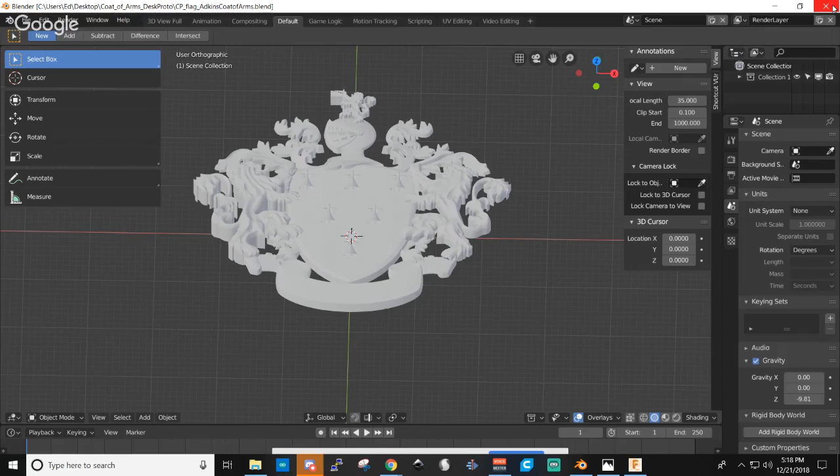No, but it doesn't matter. I've got to learn Simplify 3D. The original coder for Simplify 3D bailed on them because he didn't like the company or some crap. I don't know the exact details, but basically Raise 3D hired him to make a slicer for them, and he basically just remodeled Simplify 3D because he actually owned all the code rights since he wrote it all.

And they just updated it. You want the Raise 3D one right there, yep. Just get Idea Maker — they just redid that October 31st and fixed everything, all the problems I was having with it. And that's the other thing I like about them.

Back in probably June, July, I was complaining because the toolpaths were wrong and there were some other issues. I went on their forums and they said, okay, we'll check it out. They wrote me back and said, yep, we agree, that's not a great idea, we'll fix that. And boom, two months later, it was fixed.

There were 87 updates to the app in this last update. 87 fixes, updates, changes. And that's the third update this year. How many updates has Simplify 3D done? One in like 4 years?

I'm still on Cura 3.0 because I don't get any better prints out of any of the newer versions. The newer versions have some advantages, new features, but there's really nothing better. I think I found the settings that I had jacked up, so I just haven't gotten around to updating to the new one and fixing the settings.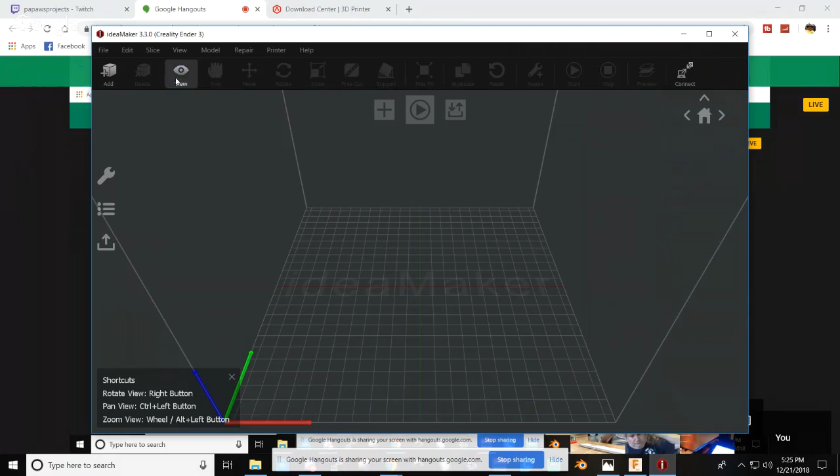So now I just open? Nope, go over to Add. That big block right there in the middle? Here? Nope, look at the top menu. You got view and add. Oh yeah, there you go. Add the STL.

It's not connected. Oh man, I got to connect. Yeah, see that coat of arms STL you just had there? That wasn't it. Oh, all right, I just wanted to see it, but sure. This one? Whatever you want, go ahead, they're all the same. They're just first version to second version, and I don't remember where I put them. Hang on a second. Oh, you haven't, they're still Blender files, aren't you? You never exported them as STLs, did you?

Yeah, that's right, you might have to export them as STLs from Blender. Yeah, you're right. All right, let me try Blender that. It gives it its own file format. And you never know, actually, I never tried it, that thing might actually import Blender files.

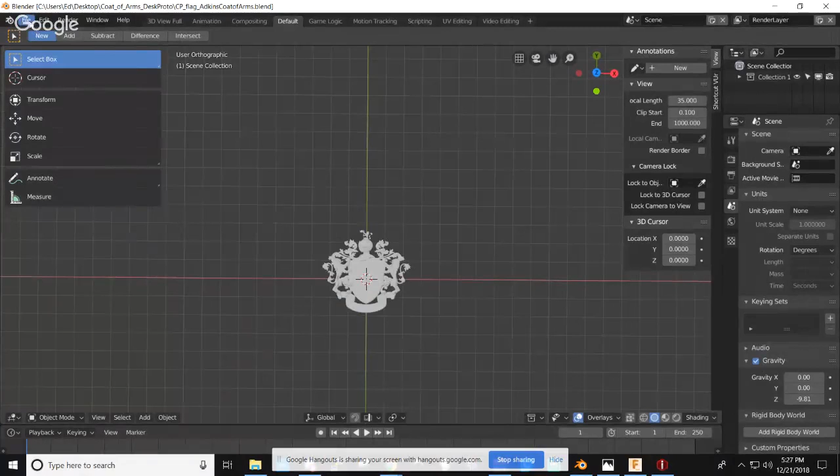Leave as STL, or wavefront object. Just so you know, a wavefront object actually has more detail. It will be a much larger file. It'll be a much smaller final item. The item is smaller in object. It doesn't stay, but it'll have more detail. It'll also be a much larger file size on your hard drive. It'll be a smaller actual file item when you import it, because there's no set dimensions with object. An object doesn't know what an inch is, or a millimeter, or anything. It just does it by its facets.

But there'll be more detail with object over STL. Whoops, I didn't want to do that, did I? Doesn't matter, it'll open it too. It's just Add actually tells it to. It doesn't have to crunch and think about what it's adding, it just knows to import it as a...

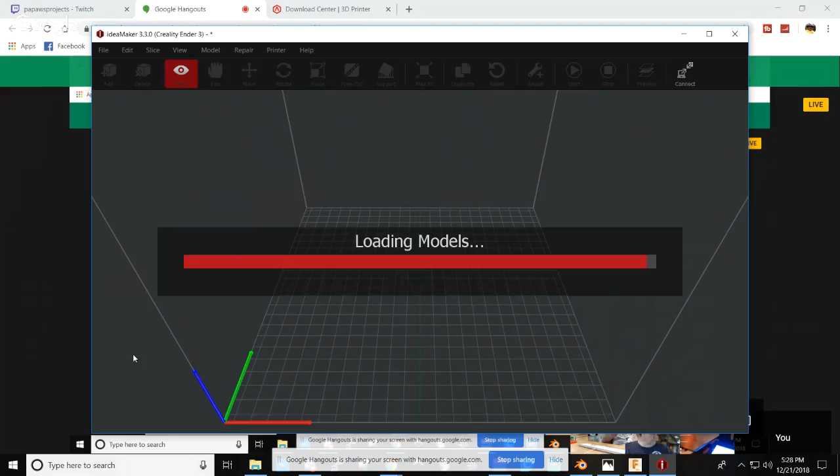When it gets in there, on the very bottom you'll see information on it. See how it's got the little orange warning sign? That tells you that's a bad file. I don't see it. Dimensions, there's 654,000 facets. If you go up to the very top, there's a little wrench with a plus that says repair. Click on that, say go right ahead.

Can I rotate this down to the plate somehow? You don't need to, but go ahead. Yeah, just look at it and go over. Actually, go ahead, because then you'll learn. All your controls are all those menu icons up there on the top. You have add, delete, view, pan, move, rotate.

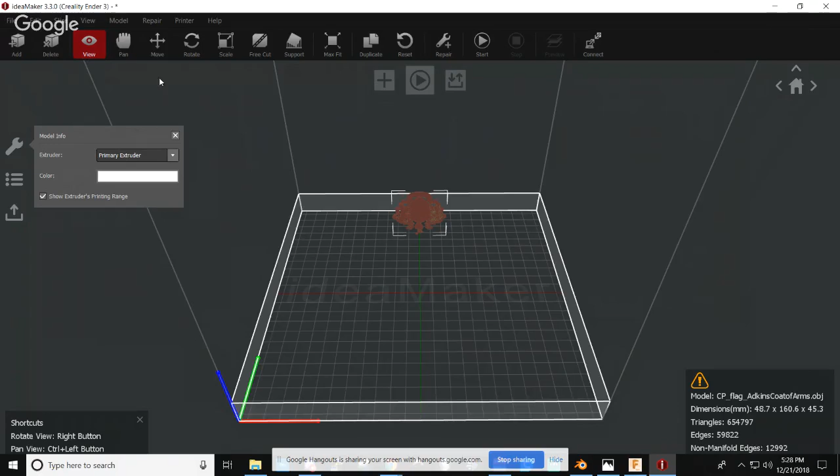Move is just moving it left to right. Rotate will actually rotate it. You can actually just click one of those little gears—see the red, blue, and green gear next to the dimensions in that window? You can just click on those and it'll do automatic 45-degree or 90-degree rotations. There you go.

And then you can say make center on platform. You don't even have to move it, just go over to that window and make center on platform. Boom, done. Wow, that's pretty cool. Yeah, it's very cool. And then hit repair.

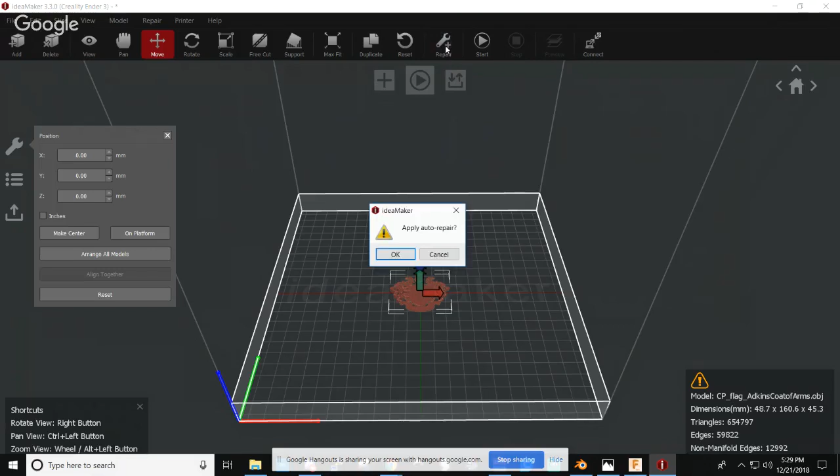Now you actually have to select it again, you have to have it selected. And then hit repair, and it'll crunch on it. It doesn't go that fast—that's an auto scroll. It may do that 1,000 times, I don't care if it works.

I've literally had some take a half an hour. I almost bailed on it thinking it crashed, but I let it go and I went off and did other things. When I came back, it was all fixed.

I actually originally, when I started using it, I used to—because you can save it after you repair it in here, you can export that STL back out. You don't have to use IdeaMaker to slice it. If you'd rather, can I edit it some more? Not in IdeaMaker, no, but I can export it and then go back in and put the guy's name.

Yeah, actually, you probably can edit it. You bring it right back into Blender and edit the STL that's been repaired.

I'm going to go make the pork one, I think. What do I want lemons and limes for? That's what you use. Actually, I was thinking—I got a new recipe, they say slice it all up into cutlets and fry it. That actually sounded good. How about with rice? We don't have any. The jasmine, no, the big bucket in front of us, full of 20 pounds of rice. Yeah, but you got that. That's fine, regular Carolina rice. Would you just buy more? We actually still have some of the long grain from last time you bought. One of the kids came with a pound because they thought there was no rice. I said there's 20 pounds sitting in the plastic container right in front of you, I just sealed it up. Yeah, that's fine, okay, I'll go make dinner in a minute. I do not like to share things with people. Yes, you're very loud and obnoxious. Thank you, I've been enjoying your conversation all the way downstairs. That's because we're doing this.

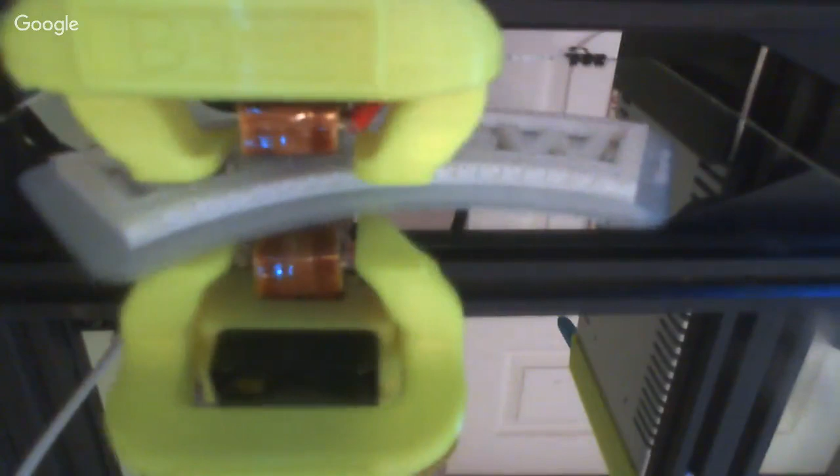How much longer has that thing got to print? Probably about another 45 minutes.

Oh, you put freaking supports in there. They probably didn't need it. Yeah, I put it at 40%. Because it's only a 2mm overhang, it should be able to do that and just bridge it. Oh, you mean supports, you're talking about not infill supports. Yeah, it's got supports in that lip. Not that it matters, because you're just going to be clipping that lip onto something.

See, now I wonder, can I do Google Hangouts on my TV with the Roku? That'd be kind of cool. Yeah, I do the Google Hangouts on my TV. I can't participate, but I can view it.

Through Comcast, you do it right through the Comcast TV stuff. Yeah, I get it through the Amazon TV. Yep, I can do it through the Amazon too. You can do Google Hangouts through that? Yep, I have a Fire Stick. There's a YouTube and a Google Hangouts app for Comcast. If you go up into the menus and into the sidebars and into apps, there's all that stuff. There's Amazon now. The Amazon Prime is part of Comcast.

Oh, that's right, yeah, because they did that last week, the Google Hangout thing of it. Amazon Prime, YouTube, Google Hangouts. You can't really participate, you can only view. Yeah, you can only see and listen to it. But it depends how smart your TV is.

Well, from what I understand, if you do have a USB port on your TV, you can plug a mic and stuff in. Well, they're saying, I don't know how it works. The better remotes, you'll be able to push talk on the remote with the mic button. Yeah, well, mine's got that, but it just listens and then it does a command, it's only a command unit. Yeah, but my Roku, if I don't plug it into the TV, I can plug a camera into there, and I should be able to get it.

I don't know, it's all in there, I haven't really played with it. I watch YouTube every once in a while on it, like when Walter's on there and I'm making dinner or something, I'll watch it, or Fun King, or whoever, 3D Printing Nerd, Angus, any of those guys. If they're doing a live stream or something, and I got to make dinner, like right now, I'll go downstairs and watch it on YouTube. Like right now, I'm gonna go downstairs. So don't you guys do anything crazy on my live stream, because I'll be watching.

Well, shut it off, the man will be viewing. You can shut the live stream off and we'd still be here. It doesn't matter, I don't care about that. You can hang out and do whatever you want, just don't... well, no, I mean, don't do like we did last night. Even if you shut your Google, I had to delete that video. I started watching that, I'm like, no, I can't leave that. We got nasty at the end.

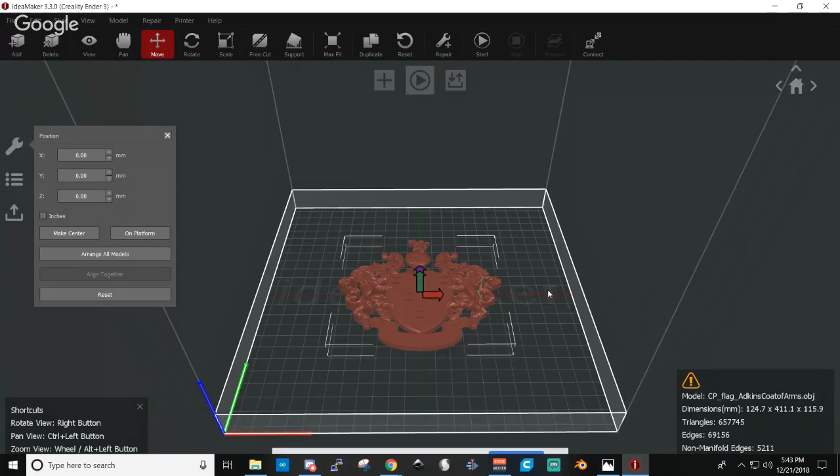You might have to do it again. It should have given you a message. Did it give you an error message that it couldn't fix it? Which I've never seen. Shortcuts? No, it says 5,211 non-manifold edges. Yeah, because that little orange warning sign will turn green if it's fixed.

Try it again. Try it again. Select it. Repair. When in doubt, try again. That should turn green, that little warning sign, if it repaired it. I've never not had it repair my model. Oh, I have. Never had ideaMaker not repair a model.

But then most of my models are pretty damn good in the first place. Oh, whatever. Yeah, no, I just always use like Fusion or something. The only time I get bad models now is when I bring them in from Tinkercad. Tinkercad produces bad models.

It gives me some options. It's had to have repaired a bunch of stuff. Yeah, because it was a lot less. Wasn't it like 10,000 bad facets? Oh yeah, it was wicked bad. So maybe I've had enough.

Now, that's all I can hear is Don saying that all the time. I catch myself saying it all the time. I don't do it.

TK's trying to get a word in and nobody's watching. Oh, hi, TK. No, I don't have the YouTube window open. Yeah, I kind of do somewhere. Hi, TK. Sorry about that. I just got to hang on to it. Not my stream, not my job. My job, man, not my job. Yeah, that's Tom's job. That's why I quit streaming, I was done with the chat.

Yeah, so if anybody needs any science projects for dissection, I got 3 dogs here. Yeah, there you go. Your wife would kill you and you'd kill yourself. She wanted to kill the dogs. They come in covered with mud and brought it all through the house. Well, you have your dogs, you'll have that.

I got my big ass 37-inch TV now to monitor if I want it. Yeah, you got white fur. There wasn't a white fur spot on you. No. Yeah, you didn't have one spot of white fur on your whole body, did you? That's nice. No, I don't want to hug you. No, I'm still mad at you.